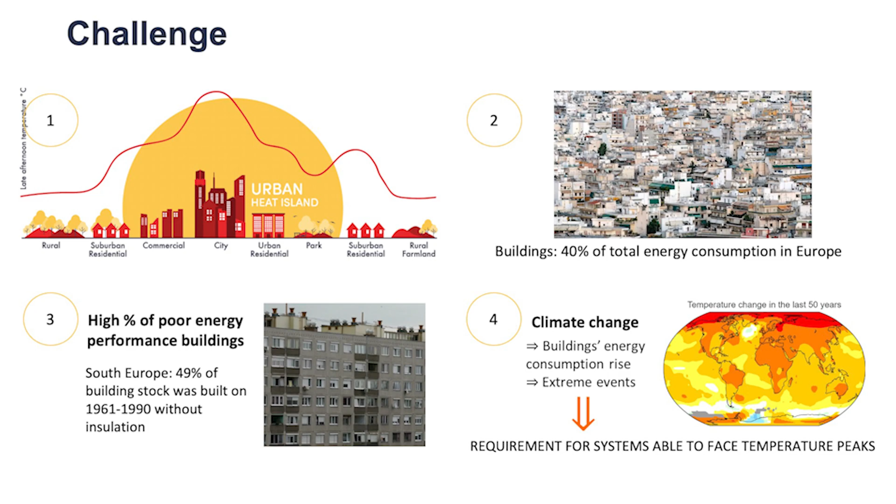The fourth pillar of this challenge is climate change. Temperatures are rising more and more every year, extreme events are increasing in intensity and frequency, and the energy demand of buildings is growing and will keep growing if the problem is not addressed. In these conditions, the improvement of the energy performance is one of the key objectives of intervention in existing buildings as well as in the design of new developments.

Mesh can be a tool towards climate neutrality. It can be a strong piece of a comprehensive solution to this challenge that many cities around the world, but especially in Europe, are facing. The European Green Deal, the plan for transforming the European Union into a climate-neutral continent by 2050, highlights the need to boost renovation in order to reach the climate objectives.

The specific goal is to have more than 80% of the building stock transformed towards energy efficiency by 2030. Renovation solutions to meet this goal are becoming more and more important every year. Adaptive Architecture Systems was founded to take advantage of the urgent need for our building stock retrofit.

Now, what is our innovative product Mesh? Mesh is a new solution that will help push our cities towards climate neutrality through modulation of the building skin. It is a novel adaptive facade system that drastically improves the thermal performance of buildings while protecting them from environmental stress. Its design is driven by physical phenomena and AI tools to achieve maximization of the building energy efficiency.

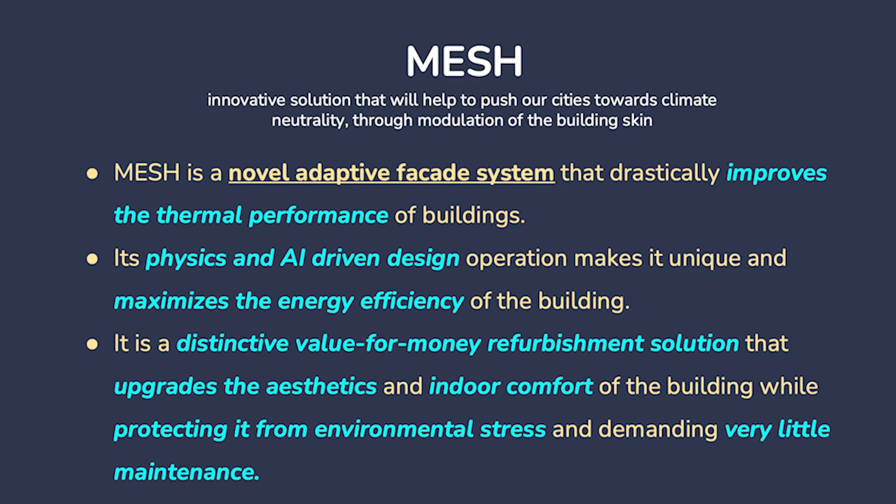It is a great value for money solution that has a small payback period. Mesh also upgrades the aesthetics of the building and it demands very little maintenance. The design of Mesh has been influenced by vernacular architecture and mostly by the integration of two wonderful solutions from the past, namely the dome roof and wind catchers, which are an indoor air cooling system in Iran.

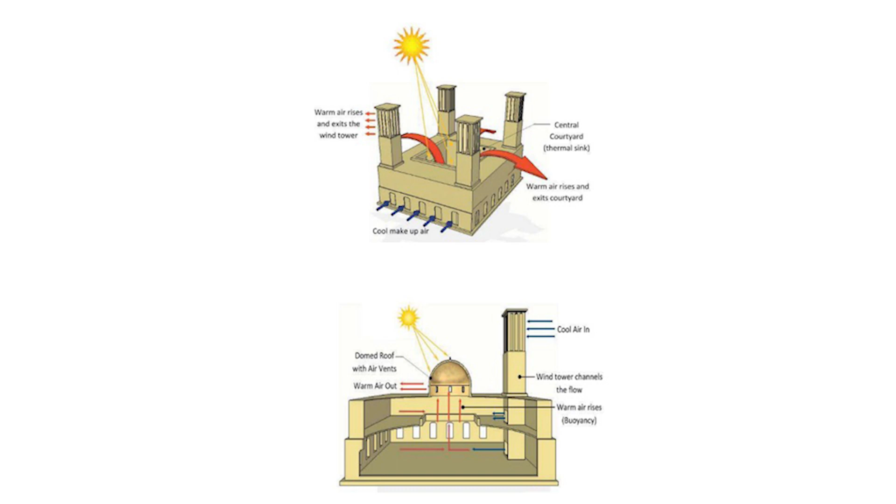We were inspired to design an innovative system that is driven by the natural stack effect, where air motion is driven by air temperature difference and air pressure difference. We used 3D parametric design tools and CFD modeling to visualize and communicate our vision, but most importantly to test its performance in different conditions.

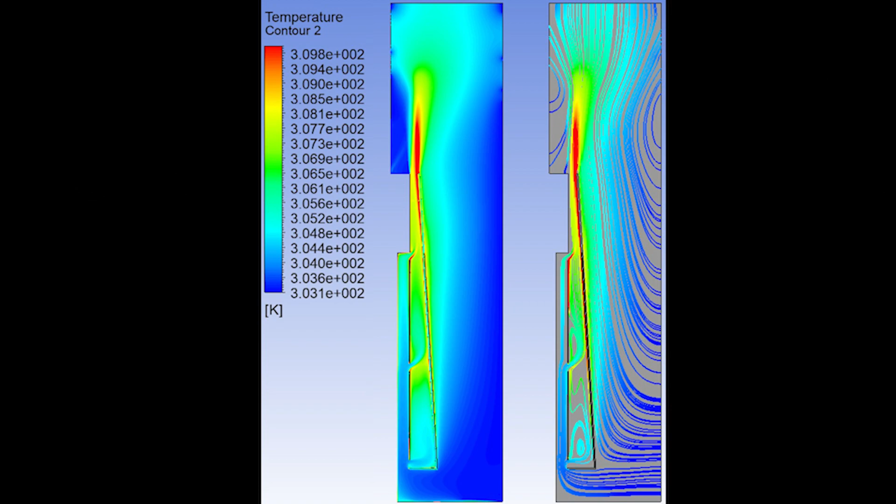Mesh is automated and driven by a central AI-based system. This system collects data from a network of sensors that is installed inside the facade, as shown in the picture. This system in time learns and adjusts according to the data input.

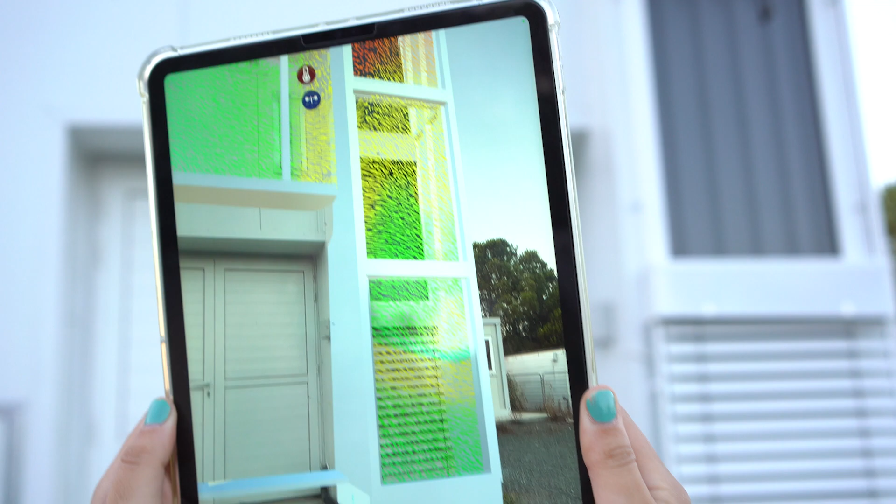So, can you explain to us what you are looking at on the iPads? Yes. Is this our minimum viable product? Yes. And what do we see on the iPad? So here we see what is going to be happening inside our MVP.

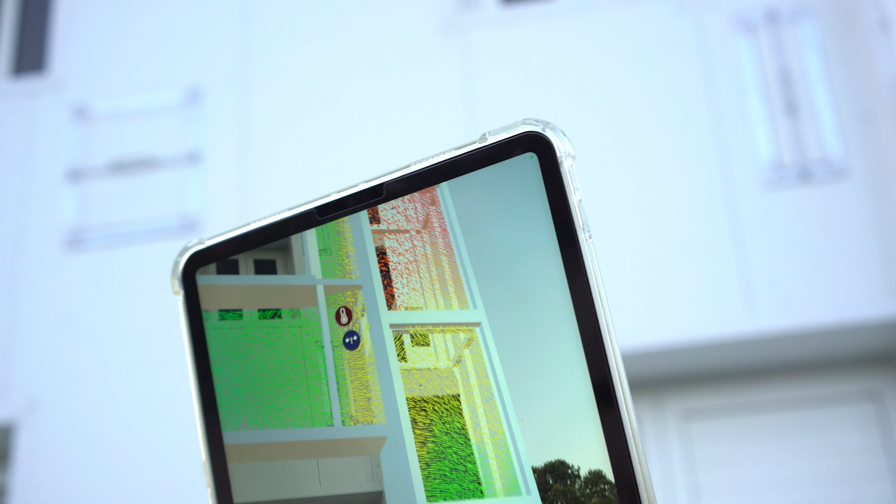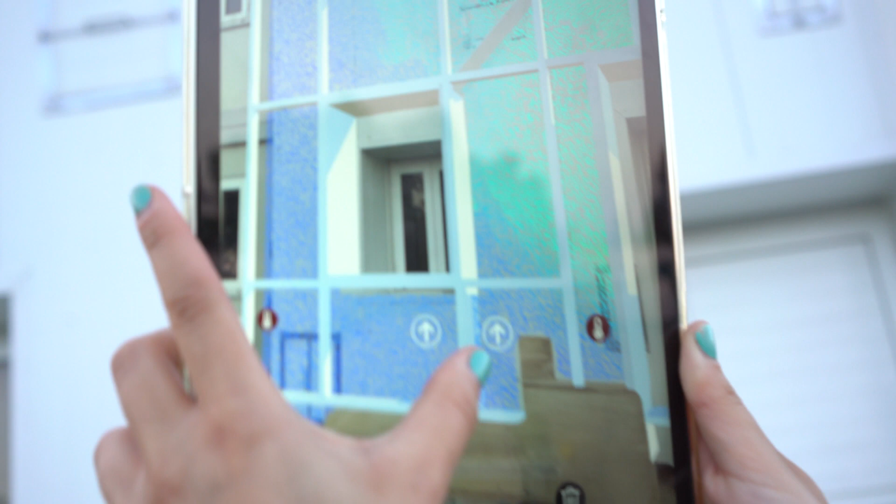And we see different colors. The different colors are indicating the different temperatures. Oh, so inside the facade there is air moving in that chimney? Exactly. Do you see here? These arrows indicate the inlets from where cold air will be inserted in the facade, in the cavity of the facade, and it's moving. We have two different air corridors. How is it moving?

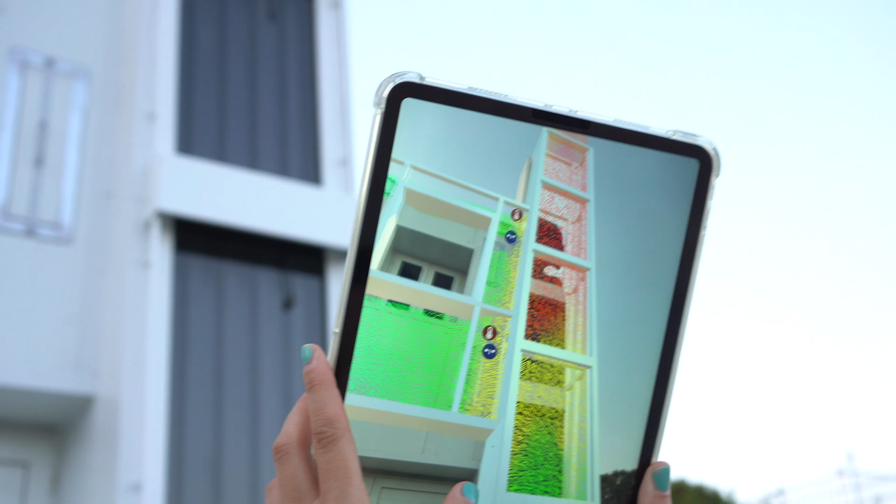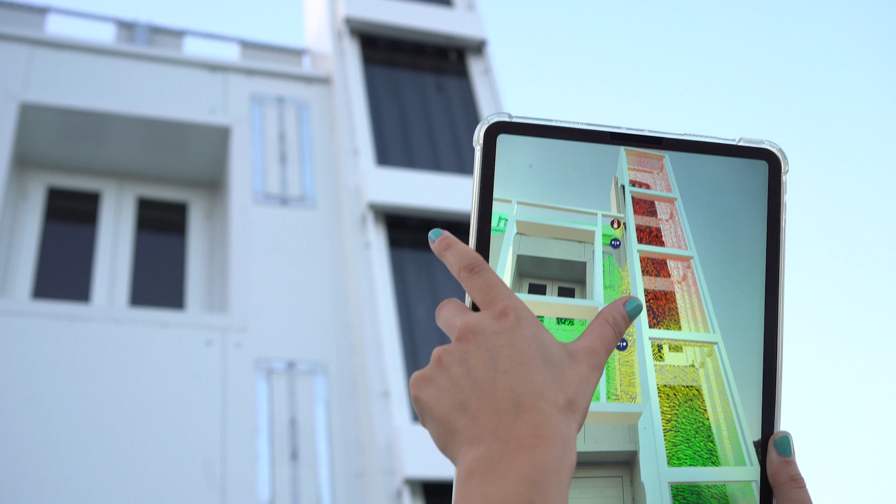So it's driven by the natural stack effect, where we have here this chimney, and the air above has much higher temperature, and because of that, the air is moving naturally upwards. This is creating a need for air mass, of course, and this air mass is taken from the corridors of the facade. And this forces the air to move inside.

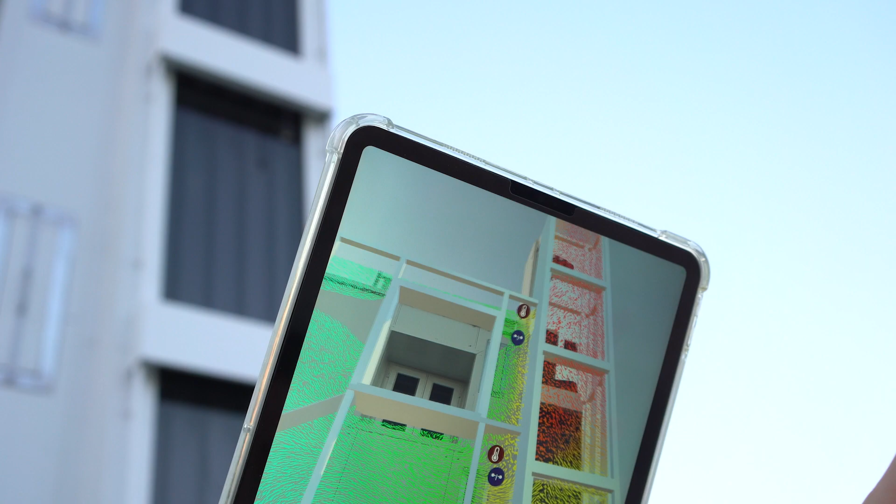So we have air, for example, entering from here, and it goes this way, and it goes up. Oh, I see. So hot air is extracted from the top of the chimney, and cold air is coming from the inlet. And as well here, we have two different routes for the air, and it's going like this. That's very interesting. And how do you control the airspeed?

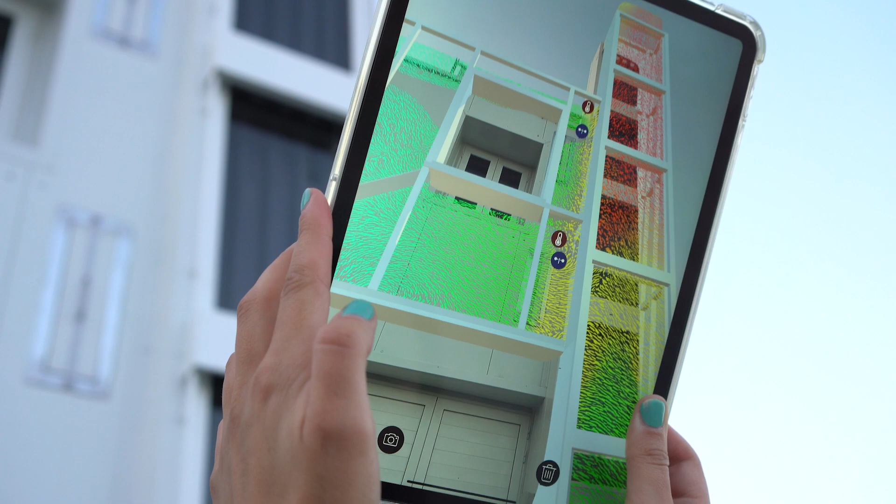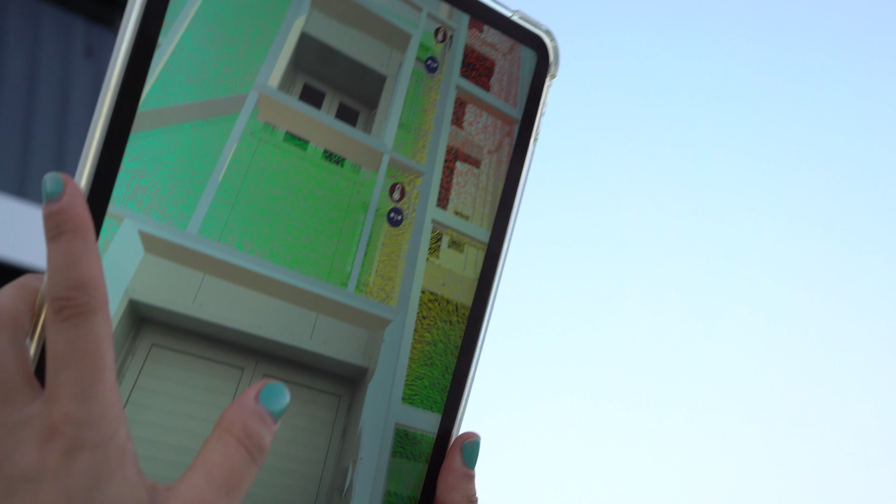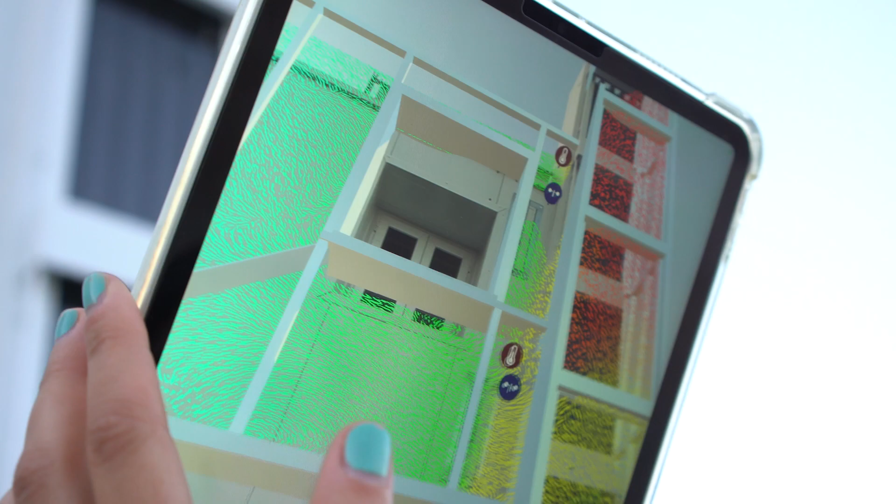So the airspeed is controlled by the sensors. We have a sensor system installed. Here you can see the different sensors. This is indicating the airspeed sensors, anemometers, and this is for the air temperature sensors. And we can control the system by understanding what is happening at each moment. So we know the temperature. So this is the system through the sensors that actually help us monitor the airflow and temperature.

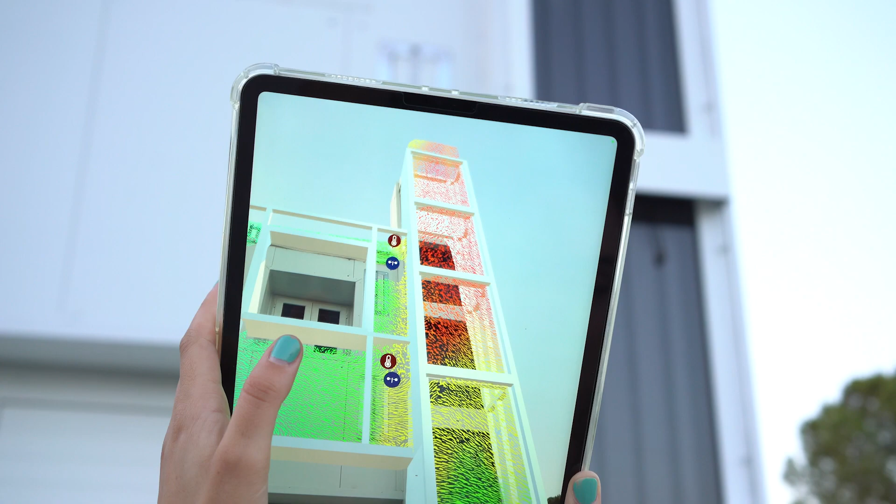But how can you stop the airflow or accelerate the airflow? Your question is very good, because we have here valves that are letting the air insert into the chimney. These valves can open and close through some actuators that are connected to the central system that is designed to be automatically functioning. And basically we collect the data from the sensors, and then according to whether or not we want higher or lower airflow, airspeed, we can open or close the valves that are in these positions.

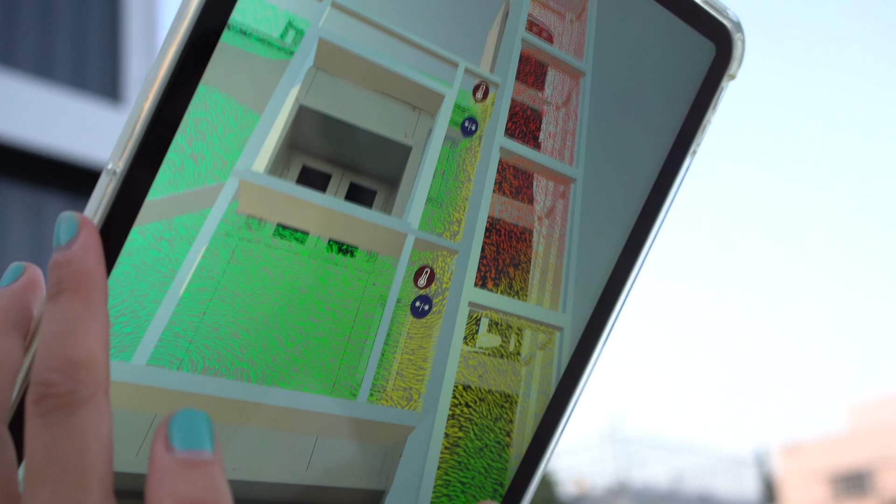So you mean there are dampers inside the cavity that we don't see here, on the side of the chimney? This is how the cavity of the facade is connected with the chimney. So here you can imagine there are some dampers which can open and close automatically.

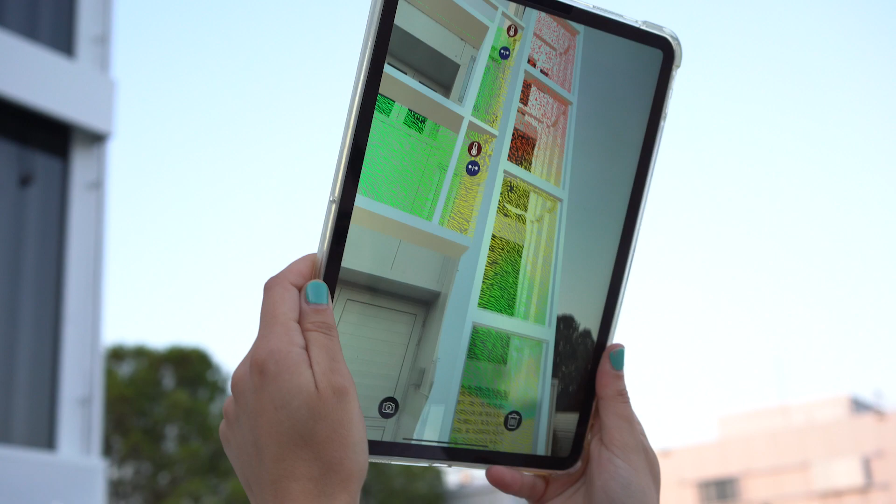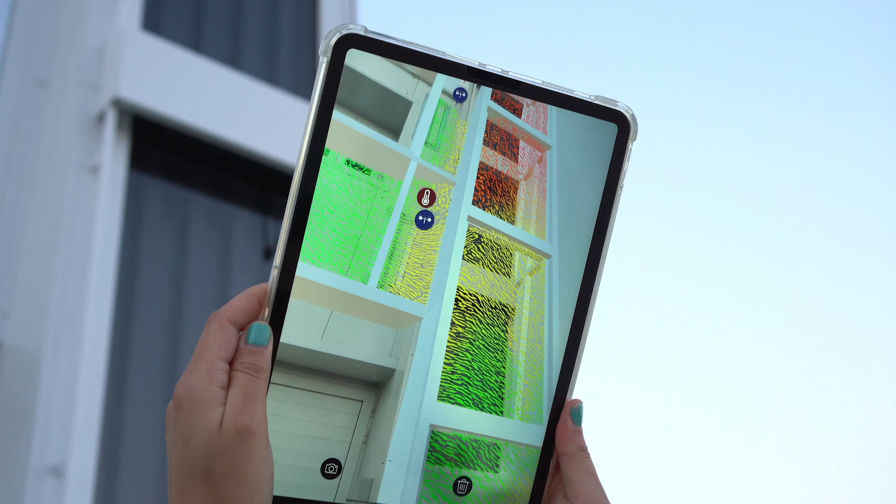And tell me, what is this black painted metal sheet that I see behind the glass? So this is the absorbing plate, which helps the air inside the chimney to heat up. And basically, you see here the blinds. Oh, yeah. So with these blinds, we have one of these blinds in each spot for the chimney, we can control which parts of the chimney will be heated up. Oh, now I see. So we are controlling the air temperature inside the chimney in order to control the intensity of the stack effect.

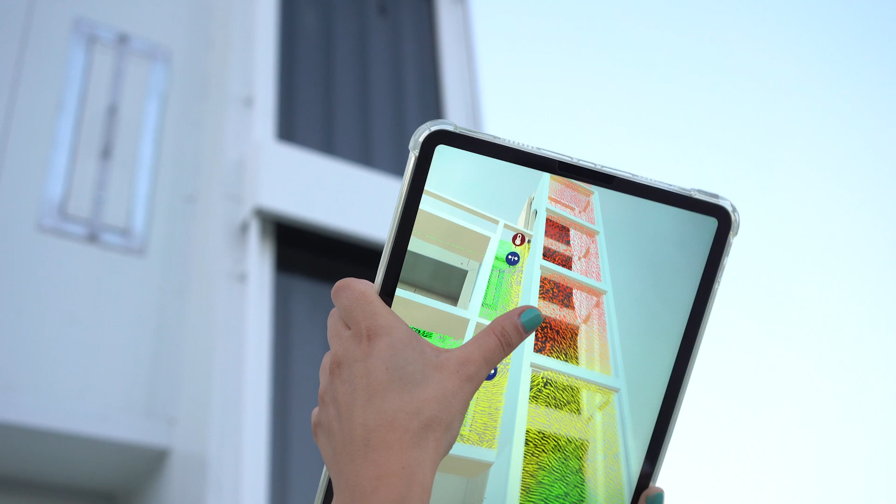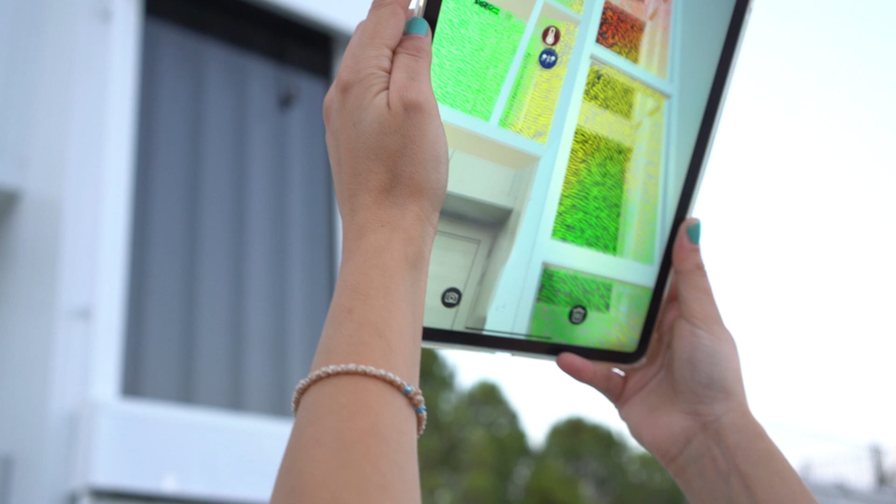So for example, for the summer function, we need the air to be moving upwards, so the upper modules of the chimney will be open. So through the absorbing plate, the sun will be heating up the air inside the chimney, and the air will be moving naturally upwards. And the bottom blinds will be closed. So we have a natural movement of air. That's great. Fantastic. Thank you very much. You're welcome.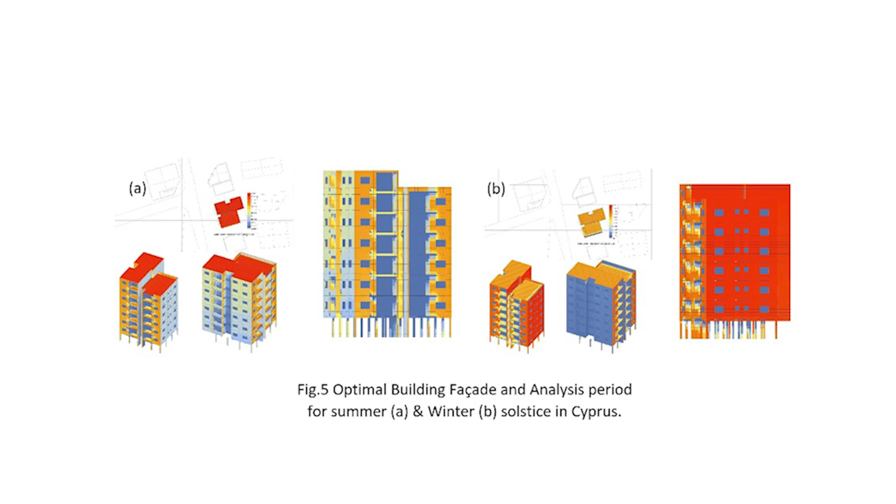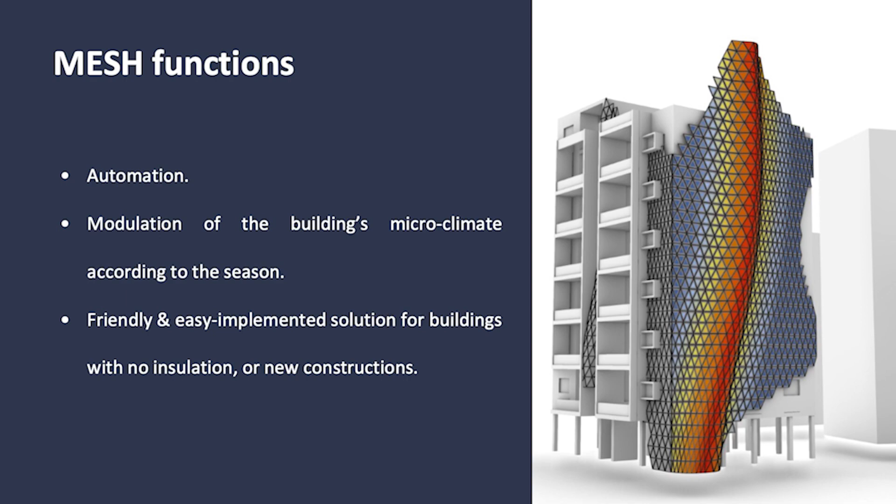The MESH system is a friendly solution for existing buildings that will improve their energy performance. It focuses on increasing the energy efficiency of the buildings while improving the aesthetics and function of their facade. MESH addresses the needs of the building renovation market for residential and tertiary building blocks that were built before 1990, putting it in a competitive position with a very low cost compared to highly customized adaptive facade systems used in landmark architecture.

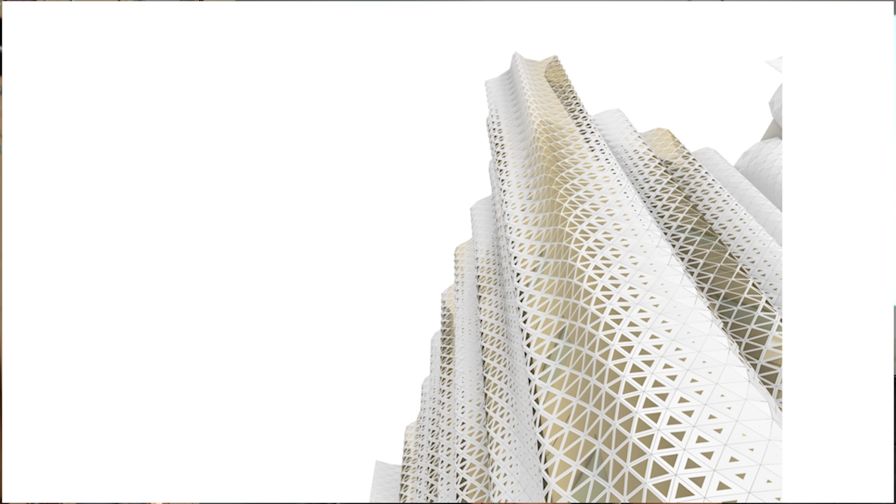The aesthetic upgrade that MESH will offer to existing buildings can be envisioned through the renderings illustrated here. MESH is a solution that contributes to the achievement of sustainable development goals. These goals are the heart of the 2030 Agenda of the United Nations for Sustainable Development. By implementing MESH as a solution, we are smartening up the building stock while making it green, fun, and interactive. In parallel, we are transforming the living spaces, making them enjoyable, sustainable, and resilient.